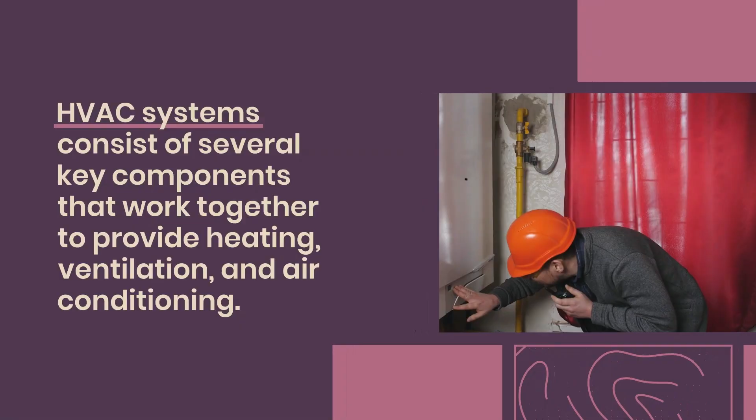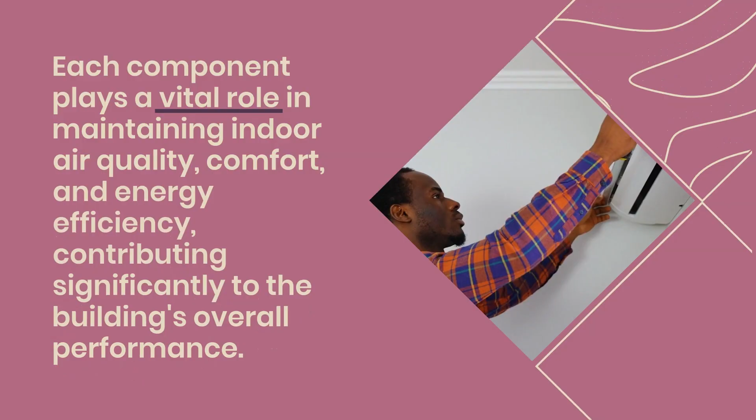4. Can you explain the components of HVAC systems in building design? HVAC systems consist of several key components that work together to provide heating, ventilation, and air conditioning. The main components include the heating unit, typically a furnace or heat pump, the cooling unit, such as an air conditioner or chiller, ductwork for air distribution, and ventilation systems to ensure proper air exchange. Additionally, thermostats control temperature settings, while filters clean the air. Each component plays a vital role in maintaining indoor air quality, comfort, and energy efficiency, contributing significantly to the building's overall performance.

5. What steps would you take to design a plumbing system for a new office building? When designing a plumbing system for a new office building, I would start by assessing the building's layout and occupancy. This includes determining the number of fixtures, their locations, and expected water usage. I would then select appropriate piping materials and sizes based on flow rates and pressure requirements. Next, I would create a schematic design that outlines the hot and cold water supply, waste, and vent piping systems. Coordination with other MEP systems is essential to avoid conflicts. Finally, I would ensure compliance with local codes and regulations, followed by a thorough review and revisions before finalizing the design. 6. How do you calculate electrical load for residential and commercial projects?

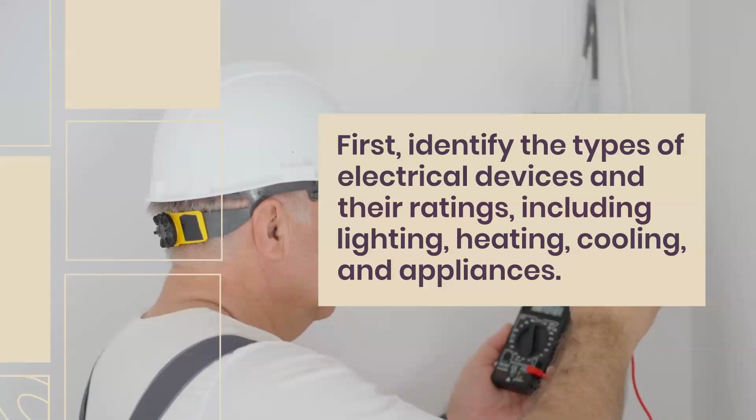Calculating electrical load involves several steps. First, identify the types of electrical devices and their ratings, including lighting, heating, cooling, and appliances. Next, determine the wattage for each device and sum the total wattages. For residential projects, apply the National Electrical Code (NEC) guidelines, considering factors like demand factors for lighting and receptacles. In commercial projects, include additional considerations like diversity factors based on expected usage. Finally, ensure that the calculated load does not exceed the panel capacity while allowing for future expansions or additional electrical needs. 7. Can you clarify the distinction between grounding and earthing?

Grounding refers to connecting electrical systems to a ground reference point, typically the earth, to prevent electrical shock and ensure safe operation. It provides a pathway for fault currents, helping to protect equipment and personnel. Earthing, on the other hand, is a broader term that often describes the process of connecting electrical installations to the physical ground. While grounding primarily focuses on electrical safety, earthing can also encompass grounding practices. Understanding these distinctions is crucial in designing safe electrical systems and ensuring compliance with relevant standards.

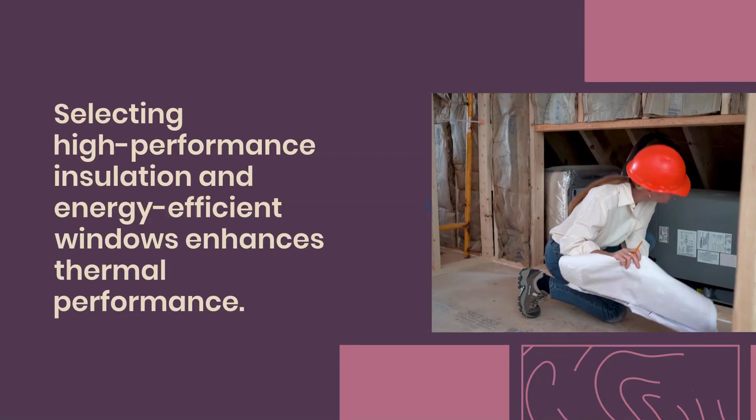8. What factors do you consider to design energy-efficient buildings? When designing energy-efficient buildings, several key factors must be considered. First, orientation and layout play a crucial role in maximizing natural light and minimizing heat gain. Selecting high-performance insulation and energy-efficient windows enhances thermal performance. Implementing renewable energy sources, such as solar panels, can significantly reduce dependency on non-renewable energy. Efficient HVAC systems and smart building technologies contribute to reduced energy consumption.

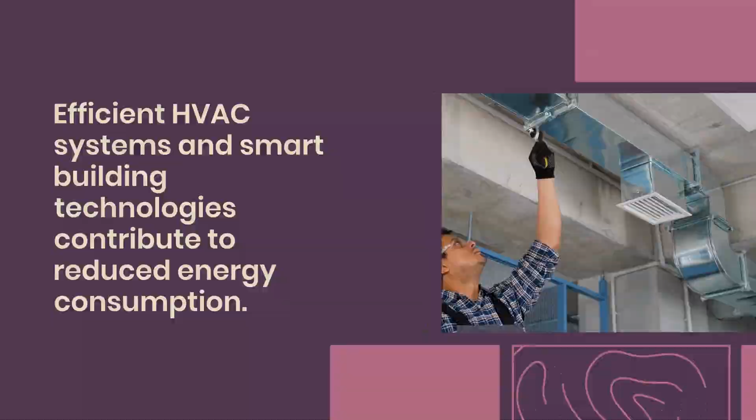Finally, water conservation measures, like low-flow fixtures and rainwater harvesting, complement energy efficiency efforts, creating a holistic approach to sustainable design. Question 9: Which types of pipes are commonly used on construction sites, and what are their permissible standby pressures?

In construction, several types of pipes are commonly used, including PVC, CPVC, PEX, copper, and steel. PVC pipes are widely utilized for drainage and irrigation due to their lightweight and corrosion resistance. CPVC is often used for hot water applications. PEX is flexible, making it suitable for residential plumbing. Copper pipes are favored for their durability and reliability in water supply. Steel pipes, particularly black iron, are used for gas lines. Each type has its permissible standby pressure, which varies based on material and application. For example, PVC can handle pressures up to 280 psi for certain sizes.

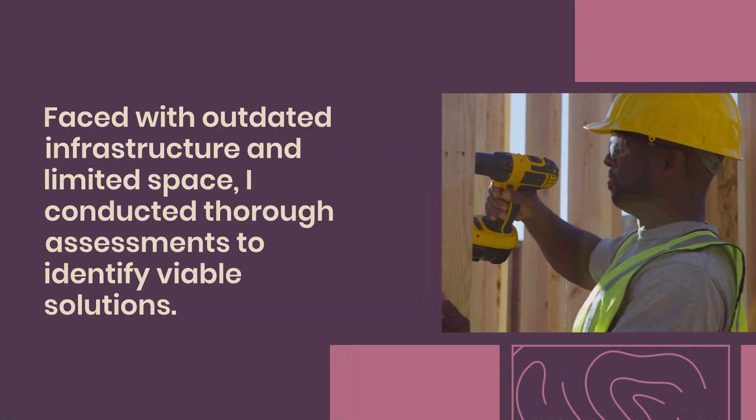Question 10: Tell me about a challenging MEP engineering project you managed. How did you overcome obstacles? One challenging project involved retrofitting an aging commercial building with modern HVAC systems while ensuring minimal disruption to tenants. Faced with outdated infrastructure and limited space, I conducted thorough assessments to identify viable solutions. Collaboration with contractors and stakeholders was crucial for innovative designs that met efficiency standards. Through regular communication and flexibility in adjusting the project timeline, we managed to complete the retrofit successfully, significantly improving energy performance while minimizing tenant inconvenience.

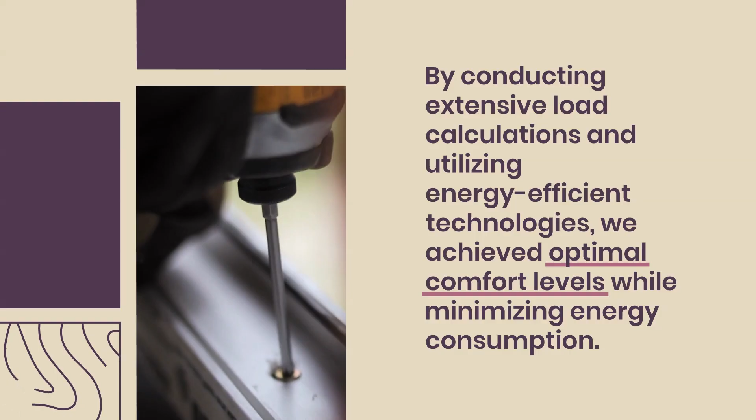Question 11: What was your most successful engineering project to date and what made it successful? One of my most successful projects was the design and implementation of a state-of-the-art HVAC system for a large commercial complex. The project was successful due to thorough planning and collaboration with architects and other engineers. By conducting extensive load calculations and utilizing energy-efficient technologies, we achieved optimal comfort levels while minimizing energy consumption. Effective communication with the client ensured their needs were met, and regular quality checks maintained high standards throughout the project. The positive feedback from both the client and end users highlighted the project's success.

Question 12: How do you handle project failures or setbacks? Handling project failures or setbacks requires a methodical approach. First, I analyze the root cause of the issue to understand what went wrong. Engaging with my team allows for diverse perspectives, which often leads to innovative solutions. I prioritize transparent communication with stakeholders, ensuring they are informed about the challenges and our strategies for resolution. Implementing corrective actions is essential, and I take notes on lessons learned to optimize future projects. This proactive stance fosters a culture of continuous improvement and resilience within the team.

Question 13: How do plumbers fit into the MEP engineering process? Plumbers play a crucial role in the MEP engineering process by ensuring the effective design, installation, and maintenance of plumbing systems within buildings. They collaborate with MEP engineers to integrate plumbing layouts with HVAC and electrical systems, ensuring optimal functionality. Their expertise is vital in selecting appropriate materials, adhering to building codes, and implementing water conservation measures. Plumbers also conduct pressure tests and troubleshoot issues, contributing to the overall efficiency and safety of the building's infrastructure. Their hands-on skills complement the theoretical aspects of MEP design, creating a cohesive system.

Question 14: Describe your approach to coordinating with other engineers and disciplines on MEP projects. Effective coordination is crucial in MEP projects. I prioritize open lines of communication, ensuring regular meetings to discuss project goals and address any potential conflicts early on. Utilizing collaborative tools and software, I share drawings and updates in real time, allowing for immediate feedback from structural, architectural, and civil teams. I also emphasize understanding each discipline's requirements, fostering respect and collaboration. By maintaining detailed documentation and scheduling joint reviews, I help ensure all parties are aligned, which minimizes errors and enhances project efficiency.

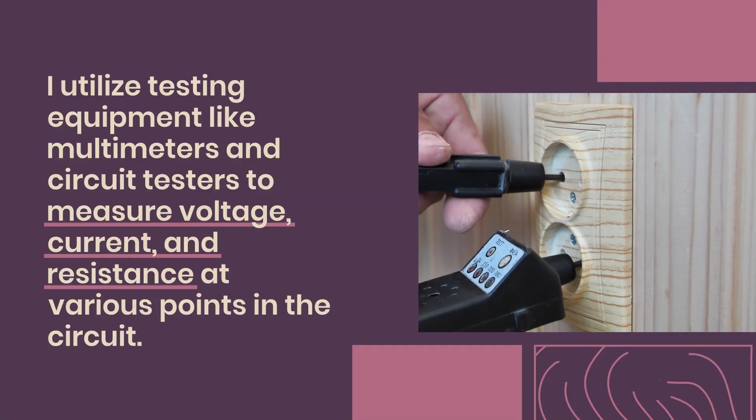Question 15: How do you troubleshoot electrical system problems in a building you've designed? To troubleshoot electrical system problems, I first conduct a thorough inspection of the system, checking for visible signs of wear or damage. I utilize testing equipment like multimeters and circuit testers to measure voltage, current, and resistance at various points in the circuit. By cross-referencing these measurements against my design specifications, I can identify discrepancies. Additionally, I review the system's layout and wiring diagrams for potential design flaws or code violations. Collaboration with other engineers or electricians is essential for resolving more complex issues efficiently.

Question 16: What process do you follow for testing completed projects and quality control checks? To ensure project quality, I begin with a comprehensive checklist that outlines all testing requirements specific to each MEP system. This includes functional testing, performance verification, and safety inspections. I collaborate with project teams to schedule tests systematically, prioritizing critical systems first. During testing, I meticulously document results and address any discrepancies immediately. Post-testing, I evaluate the data to confirm compliance with specifications. I also conduct a final review with stakeholders to ensure satisfaction and gather feedback for future projects.

Question 17: How do you ensure safety compliance in your design plans? Ensuring safety compliance involves a thorough understanding of relevant codes and standards, such as OSHA and local building regulations. I conduct a comprehensive risk assessment during the initial design phase, identifying potential hazards associated with MEP systems. Regular collaboration with safety officers and project stakeholders ensures all safety measures are integrated. I also implement design reviews and site inspections to verify compliance during construction. Training and communication with the installation team are crucial, enabling them to follow safety protocols effectively.

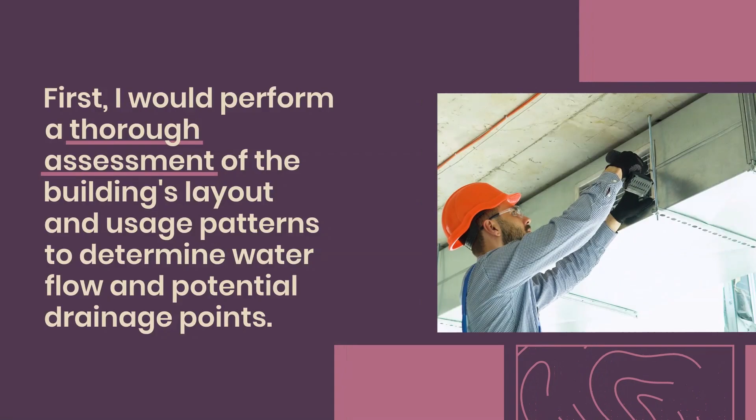Designing a drainage system for a multi-story commercial building involves several key steps. First, I would perform a thorough assessment of the building's layout and usage patterns to determine water flow and potential drainage points. Next, I would calculate the expected drainage loads, considering factors like roof area and occupancy. I would select appropriate materials and sizes for pipes to ensure efficient water flow and prevent clogs. Importantly, I would incorporate a combination of gravity drainage and pump systems where necessary, ensuring compliance with local building codes and regulations for effective drainage management.

Describe a situation where you resolved a conflict between different MEP systems in a building project.

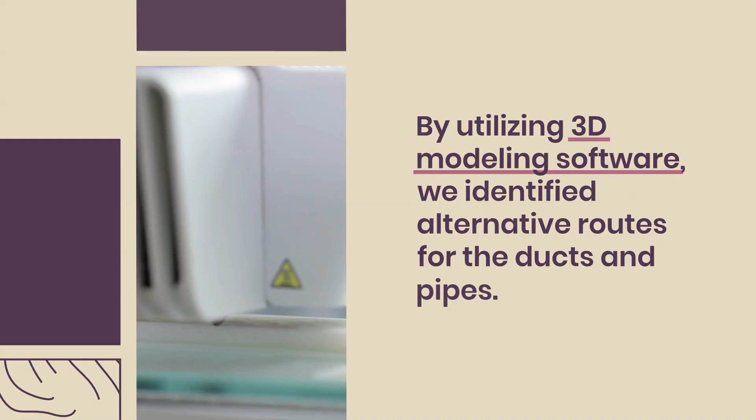In a recent commercial project, we faced a significant clash between the HVAC and plumbing systems due to space constraints. The HVAC ducts were initially designed to run through the same area designated for plumbing lines, creating a potential conflict. To resolve this, I organized a collaborative meeting with the HVAC and plumbing teams to review the designs and assess the physical layout. By utilizing 3D modeling software, we identified alternative routes for the ducts and pipes. This not only alleviated the conflict but also enhanced the efficiency of both systems without compromising functionality or performance.

What codes and standards are you familiar with for MEP design, for example, ASHRAE, NEC, NFPA, IPC?

I am familiar with several important codes and standards relevant to MEP design. ASHRAE standards guide HVAC system design, ensuring energy efficiency and indoor air quality. The National Electrical Code, NEC, outlines safe electrical installations, while NFPA standards focus on fire protection and safety systems. Additionally, I adhere to the International Plumbing Code, IPC, which provides guidelines for plumbing systems and fixtures. Staying updated with these codes is crucial for compliance, safety, and producing designs that meet industry regulations.

How do you incorporate client feedback in your design and during project delivery?

Incorporating client feedback is essential for a successful design process. I begin by actively listening to the client's needs and preferences during initial meetings. Throughout the project, I maintain open lines of communication, using regular updates and review sessions to gather their input. I encourage clients to express their thoughts on design drafts and proposals, ensuring their concerns are addressed promptly. By integrating their feedback into revisions, I create designs that align with their vision while maintaining technical integrity. This collaborative approach fosters trust and strengthens the client relationship, resulting in a more satisfying project outcome.